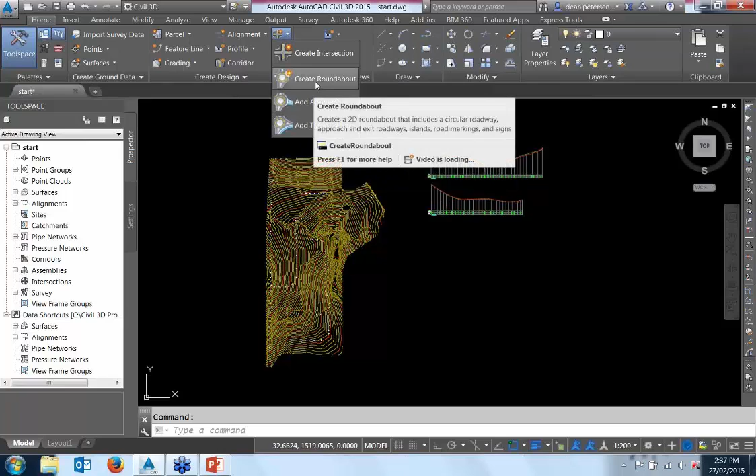Okay, so starting at the beginning, I guess, and then taking it a bit further. So about the 2010 version, they introduced these intersections in the intersection tool, which is up here in the Home tab of the ribbon under this drop down here, for create intersection. Now there is below that some things about roundabouts, but if you hover over them, there's a little video that shows you what they're about.

Making a 2D design of a roundabout, they're not making a 3D object. So to make an actual 3D corridor that you can use to make surfaces, etc. off, you need to use the first one, the create intersection tool. So that's the one we're going to have a look at today. Let's click on that.

It then says select the intersection point. Now in this data set I've got a whole bunch of alignments, and I'll try not to move the screen too fast so it doesn't lag too much on your machines running over the web. But each alignment has its own design profile already. Now it does require a design profile on each alignment running in so that it can work out the levels it has to make this corridor at. If you don't have a design profile for each incoming road, you'll get halfway through the wizard we're about to go through and you'll find that part of it's grayed out. If that happens, it means you haven't got design profiles for all of the incoming roads.

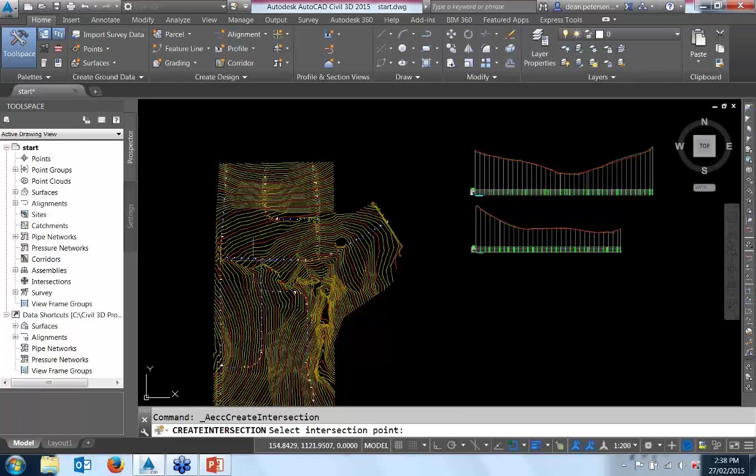In this case, we've got T intersections, but it works just fine with X or cross intersections as well. These are not actually at 90 degrees, it handles angles and things quite easily, and intersections on corners, no problem as well. We're going to do one here to begin with anyway.

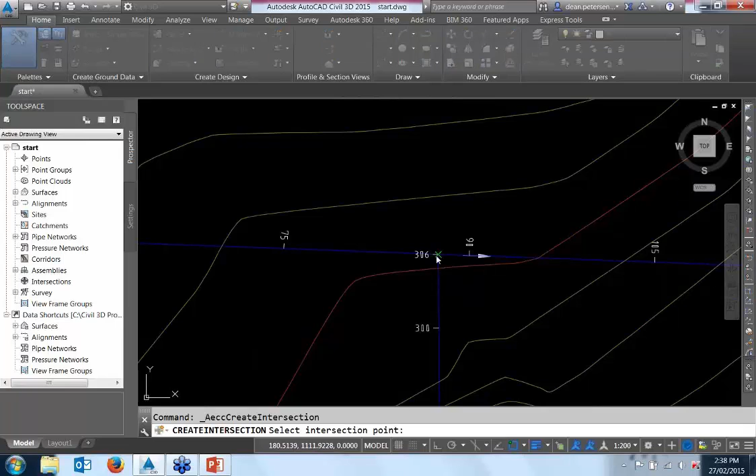So I'm just going to, when you start the command, on the command line, it says select the intersection point, find where two alignments intersect, and click there.

Okay, so this is the wizard that comes up. It's a 3-step wizard, and you just basically look at each of the components in each step. So you can give the intersection a new name if you want to. I think this is utility 3 and utility 2 if I remember correctly, but let's just run with the defaults for the moment. And it's going to put a label there that goes on no plot layer, so that's fine.

Main option in here is what do you want to do with the crossfalls of the main road. You can either run the main road all the way through, maintaining its crossfalls, so the side roads match into it, or you can go all crowns maintained, so all the roads meet at a point in the center, but whichever road you drive through, there will be a bump in the crossfalls as you drive directly through that intersection.

The more normal case is the primary road crown maintained, and if you've got T intersections such as we have here, the top of the T that runs all the way through will be the main road by default. We'll go next.

Okay, so here's our main road at the top, priority 1, and the secondary road, priority 2, down below. You can change that order with the arrows at the side if you've got a cross intersection. So basically the second stage of the wizard, you just click on each of these 4 buttons and fill them out as needed. So we've got offset parameters first, which brings up this little panel.

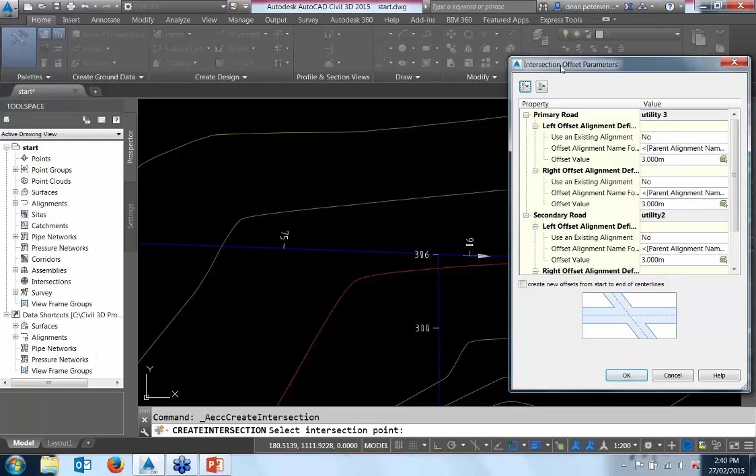Now, if you have a look in each of these panels down the bottom, there's a little picture. And when you click on one of these lines up in the table above, it both highlights in the background the alignment that it's referring to as the primary road, which is utility 3, so I click on that, it highlights, and the secondary road is the one heading down to the south there, utility 2. If you click on the space for the 3 meter entry here, the offset value, you can see that it is the width of one of the roads, in this case the main road, that you're going to be typing in that pane, and that is the width of the other side of the road when you click on that. So watch the picture down the bottom, that'll tell you what it's wanting.

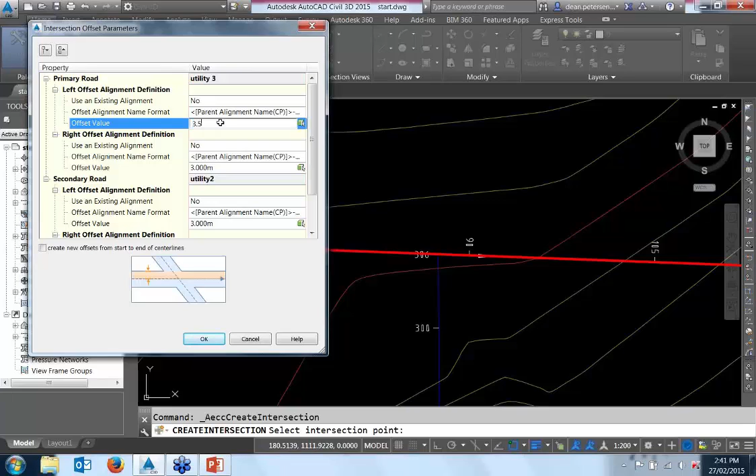I'm going to leave that 3 meters, I guess. Oh, let's make that, let's up that one, make it 3.5, and that one 3.5.

And for the secondary road, we'll leave those as 3 metres and 3 metre lane widths, and those are the lane widths up to the edge of seal.

You do have the ability here to use an existing alignment, so you would set that to yes and select your alignment. If you had an existing curb you wanted to keep as a side of the intersection that you've surveyed, you could run an alignment through that, tell it to widen the intersection out to that alignment, and then match the levels when we set the crossfalls of the slopes. You can match into the levels of an existing curb, which would be a surface profile out on that alignment.

So that's always useful. However, in this case we don't need to do that - we've got a bit of a greenfields here. We will use that shortly when we combine these things together though.

What I always do is tick on this create new offsets from start to end of centre lines. This is going to make offset alignments which are slaved to the centerline alignments of each road, but they define the widths of the intersection, plus I'm going to run them all the way along the alignments because we want to use those later on. I usually always tick that one on. So do that and go OK.

The next step is what do we want for curb returns. So if we click on the curb return parameters, here are our curb return parameters. Again, in the background, it highlights the particular curb return we're talking about. So if I change another quadrant, it shows me which quadrant we're talking about.

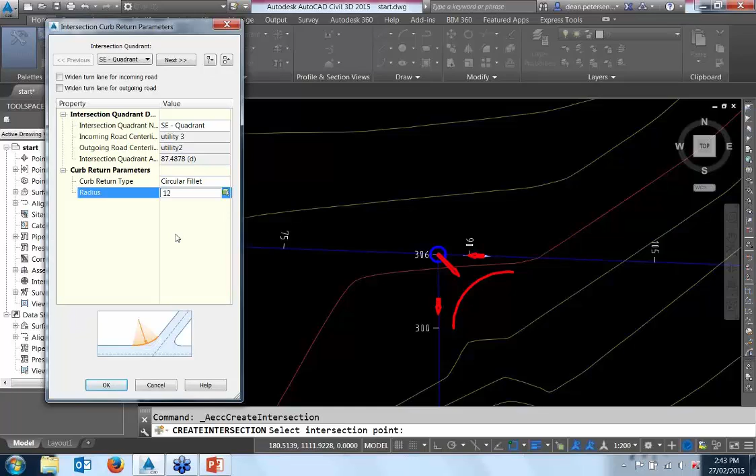You've also got options here if you want to widen the turn lane for the incoming road, which makes a turning lane for going into or around this particular curb return. And you've also got widen turn lane for outgoing road, which makes a merging lane once you've gone around the corner.

Let's actually do one of those. So let's just do a turning lane in there to get the traffic out of the way, the main flow in the main road there before it goes around the corner.

And again, you've got sections and details down the bottom here of a linear transition, the lengths, and what size you want, what offset values, etc. You can all change in there for this turn lane. So let's just run with that for the moment and go OK.

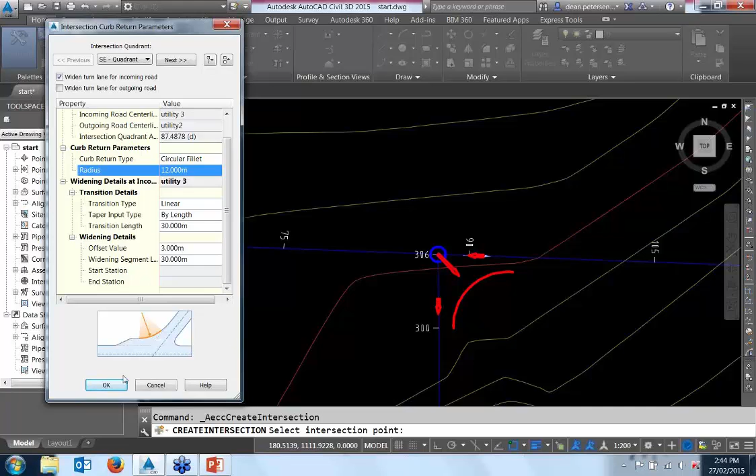Next button is the lane slope parameters. Click on lane slope parameters, and it's just the crossfalls of each road. So let's just run with all 3% minus all 3% sloping away from the centre line.

Obviously, if you have mono slope, you can make one negative, one positive, and this is where if you had an existing curb, you could tell it to use the surface profile for the existing curb out on the alignment you've drawn, and it would match or change the crossfalls to match whatever's existing out there, which is also very useful. We're going to use that as well when we put two of these intersections together. So I'm just going to leave that all as 3% at the moment and go OK.

And lastly, curb return profile parameters. This is basically going to put a little 10-metre stub on the ends of the intersection, and I find that very useful. You can make them smaller, even half a metre if you want, but I do find those useful to have, and you'll see why in a moment.

Thing to note, in profile, the curb return is always drawn as a straight line profile, so if you're in fairly steep or rugged terrain - well, a lot of New Zealand's pretty steep anyway - you do need to go and have a look at the curb return profiles and perhaps draft your own one there. I will have a look at that as we go, but that's a reminder of what the software actually does.

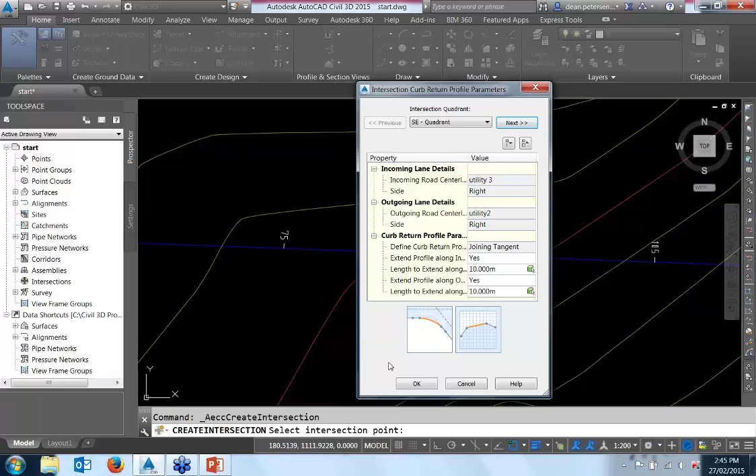So we'll leave that as all good and go next. The last step in the wizard is to decide what you want to do. We're going to create a new corridor, since we don't have a corridor at the moment in this drawing.

The EG surface for the daylight or batter slopes to finish on, that's great. Now, the one thing you need to do the first time you come into here is click the Browse button. When you do that, if you haven't used the intersection tool before, you will be in this folder, which has the American assembly sets for making the corridor from.

These do have a left-hand side drive of the road, but more often than not, when people use these, they grab the right-hand side drive of the road, and the corridor ends up turned inside out. The intersection corridor is inside out, with the batter slopes in the middle and the lanes on the outside.

I recommend that you go up one level in the folder structure here and grab the ANZ folder, and within there we've got three options, all left-hand drive, so we can use those. Let's grab the curb and footpath. You can go curb, no footpath, or just a paved area and put on your own curb and footpath or shoulders afterwards.

But let's grab the whole lot. At the moment, go curb and footpath ANZ and click open. Next time you come into here, it will have remembered that choice, and in this dropdown you'll be able to select it.

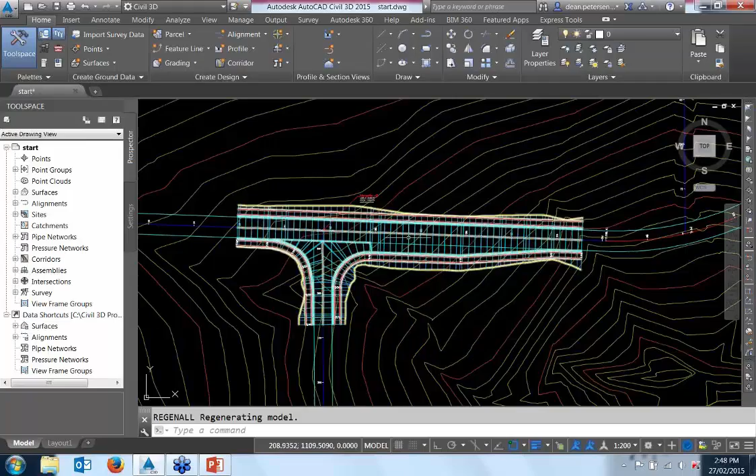First thing I always want to do is pick the corridor, right-click Object Viewer, give it a rotate, let go of the left button, and see that it has formed up correctly, and that's looking pretty good. So I'm pretty happy with that. It's all at the correct levels, and it's running well.

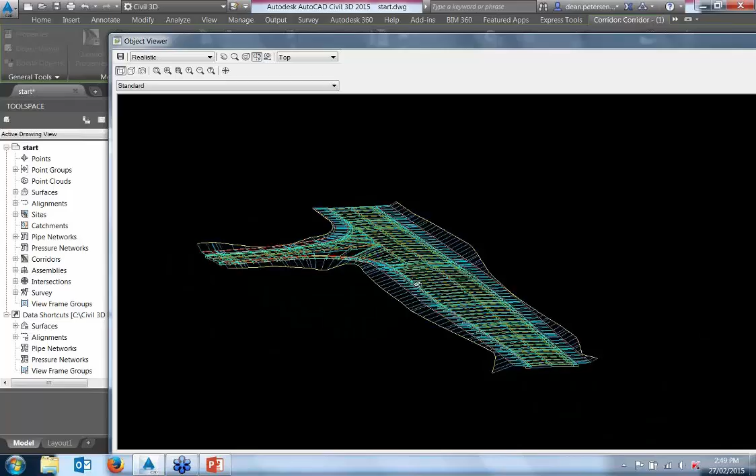Okay, that's one intersection. Now there's two schools of thought, really. Let me just do a save at that point, just in case—I'll do a save as, throw it on the desktop.

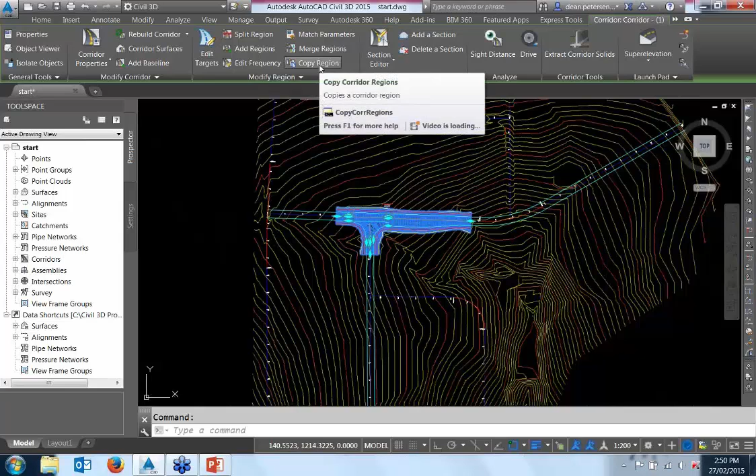There were two schools of thought when these intersections first came out. One was to make your corridors first, leave a space in the middle, and then make your intersections afterwards, filling in those spaces between the corridors you'd already made. The second school of thought, and the one that makes more sense to me, is to make your intersections first, as I've just done here. Then, once you've got them created, you can fill in the gaps in between, or the bits of road you want to extend them along, by picking the corridor, going copy region up in the ribbon, and picking the end region.

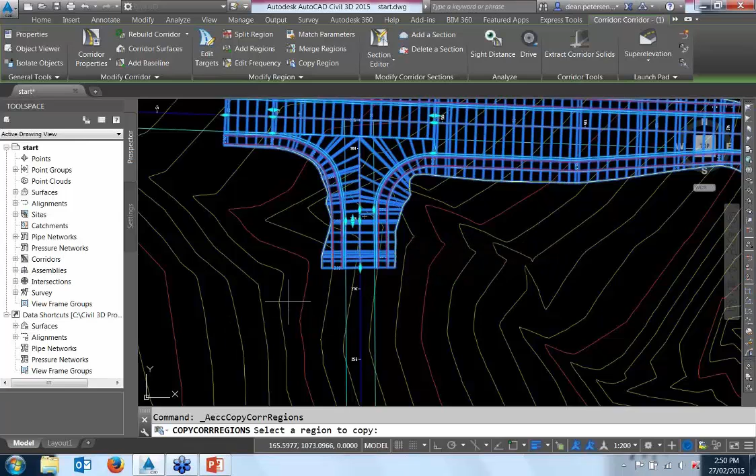Now here's something—have you noticed 2015 AutoCAD, when you pick objects, often wants to highlight them in blue like that? On the command line it's saying select a region to copy, and here's my first tip and trick. Used to be, when you move your cursor over a region, it's actually highlighting in blue, but it's already highlighted in blue, so you can't see the additional highlighting. I'll just hit escape here, get out of that. There, you can turn that off—there is a command called selection effect.

If you type SELECTIONEFFECT on the command line, you should get the selection effect. It will be on 1 if you haven't changed it already. Put it on 0 and it goes back to the old selection style.

So when I pick that corridor, it now goes, those dashed lines don't turn blue, which means that when I go to copy region, it highlights the regions again for me to pick from in blue, which is nice. So I now want to pick this one.

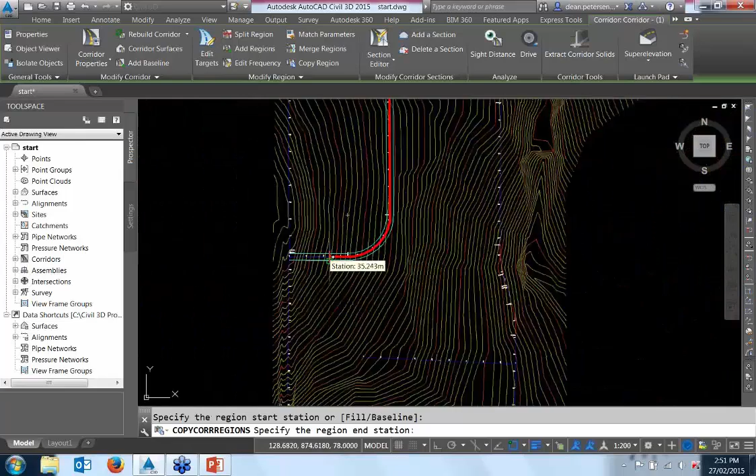One of the reasons why I left the 10-meter stub on was that I can pick it and copy it, and it gives me a little runner. Because I told it to make these cyan lines on either side of the main centerline as the offset alignments, running from the start to the end of each alignment, they go all the way down the road. So I can say I want my new region to start here, run all the way back down the road and around the corner and to about there.

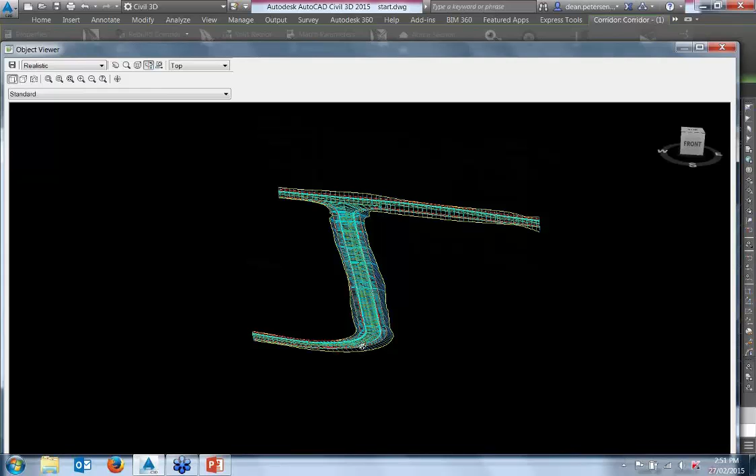And now you can see I'm actually using the corridor that has been made for the intersections, but just duplicating it down the road where I need to, so I don't actually have to manufacture the road down the hill. It's being made for me with the assemblies of the intersections.

So we should have a look at those assemblies and intersections. What it actually did when we built that intersection was bring in, and it'll be somewhere up near the top right-hand corner of your model space, these assemblies. Now what I normally do is move the text a little bit just to line up so I can read it a bit more easily.

These are all the components used to make up that corridor for the intersection and now for that section along the road. You can change these, so put your own batter slopes on them, put your own footpaths or curves, whatever you like. There's a nice little tool actually these days.

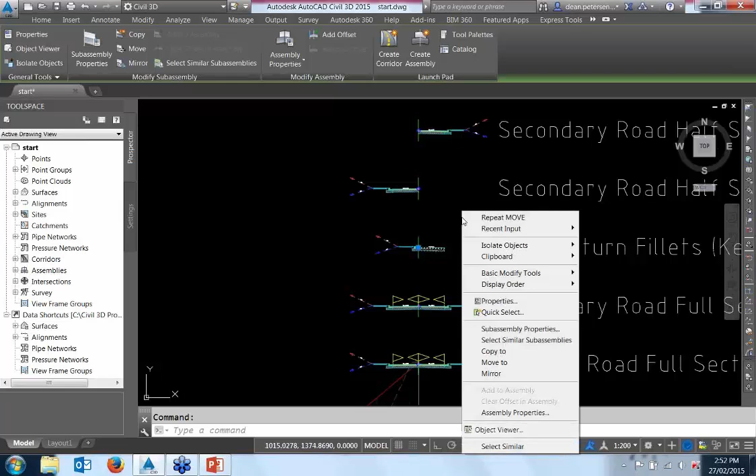If you pick any subassembly, you can right-click and go select similar subassemblies, and it grabs all the ones in your drawing of the same type, and then you can go Control 1 or right-click Properties and change all their properties all at once, which is very useful.

Similarly, you do want to make sure it grabs them all as well. Sometimes these daylight lines can be slightly different all through here. But obviously if you're changing one, you probably want to, well, almost always will need to change all of them at the same time to make sure your intersection is correct all the way around.

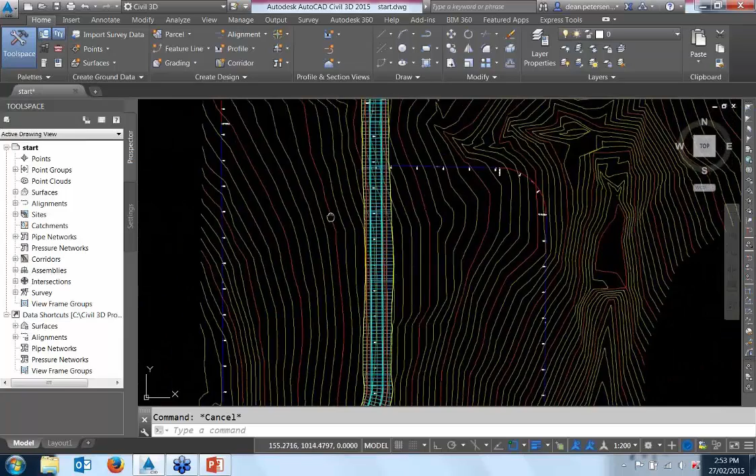So that's where those assemblies come into it, and those are those A and Z ones we picked on the way through the wizard. All right, so let's look at now making another intersection over here, another part of our subdivision. So we start the wizard again.

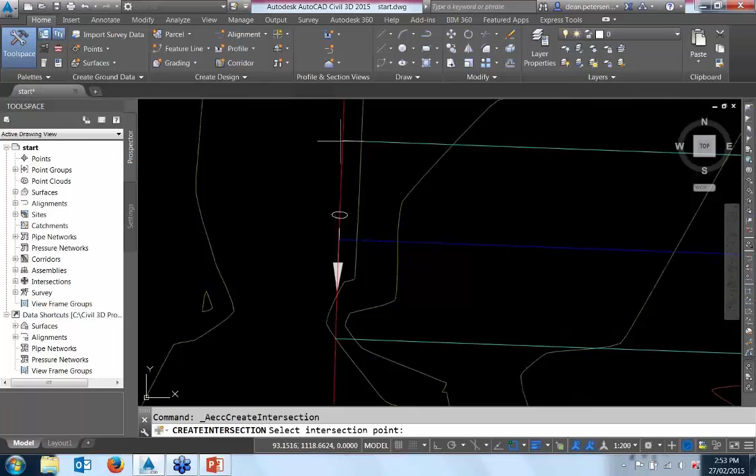Intersections, create intersection, and make sure you do get the center line. Don't pick the offset alignments over here. Grab the two center lines that intersect. And we're looking at making a new one.

So in this case, let's use the other option just for the heck of it. All crowns maintained. Go next. That's all fine. The offset parameters for this one.

Now, here's the slightly new bit. We've got a primary road, this one running all the way through here. We don't have any offset alignments on either side of that, so we want to create some more. So I'm going to tick on create new offsets from start to end of center lines again. So for that, let's make that also 3.5 and 3.5 wide.

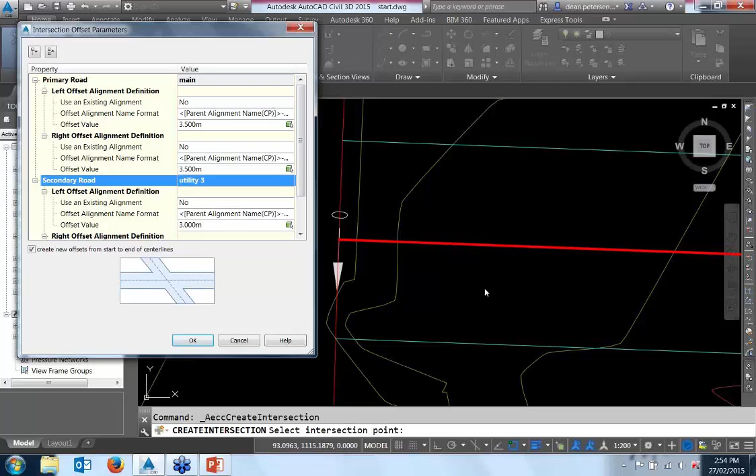But for the secondary road, which is now this road here, we do have our offset alignments and our offset crossfall levels based on those alignments to use. If we just left this as it is, it would create new offset alignments running all the way along that alignment, and you'd end up with two objects over the top of each other, and it could get quite messy if you've got lots of intersections in the drawing.

So what we want to do is tell this to use the existing ones for the secondary road, which is the one highlighted in the background there, which is our utility 3. So where we see it says use an existing alignment, we're going to go yes. So we don't have an existing curb line surveyed out there, but we do have these running off the other intersections, so the alignment name we want is...

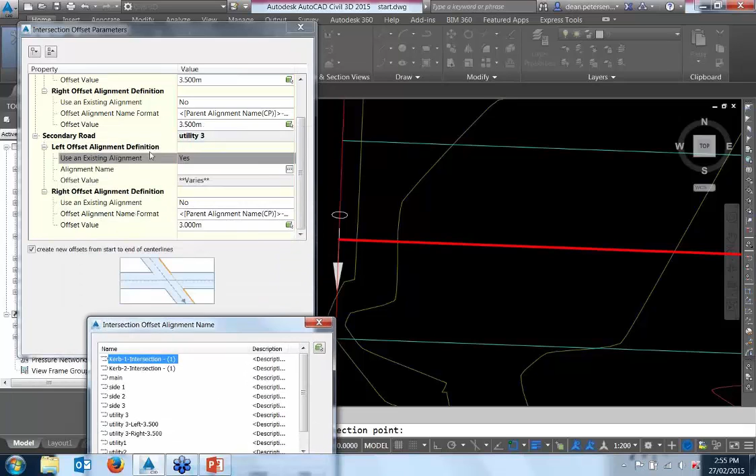Now you do need to be careful which is the left and the right. This is the left offset alignment. This alignment runs, the chainage runs from left to right, so the left hand side is going to be to the north.

You can pick this green button up the top here to pick on screen, and pick that offset alignment to the north. You can see they have been well labelled: it's utility 3, which is the centerline name, it's the left, and 3.5 metres out. So that's the one we want.

We go OK, and for the right we're going to use an existing alignment, yes. The alignment name, again because it's well labelled I know what it is, it's utility 3 on the right, and go OK. Do make sure you get your lefts and rights around the right way, and that they are the correct ones for that centerline, or the intersection just won't work.

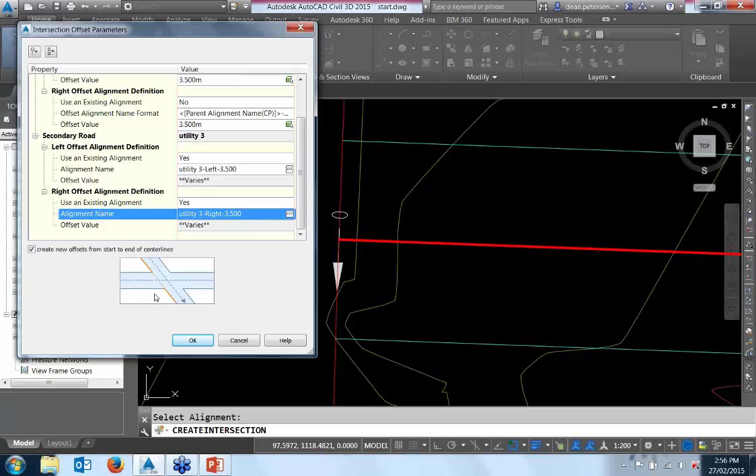Alright, and again tick on that button, create new offsets where it needs to, and we go OK. Curve return parameters, I'm actually just going to run with the defaults there for the moment. I don't need to change those.

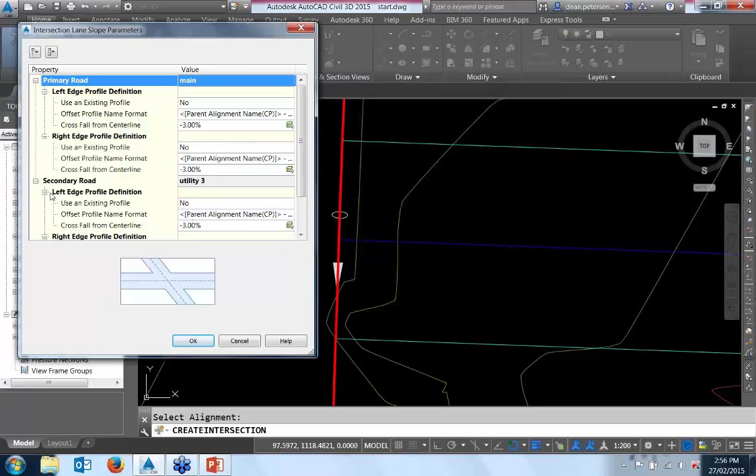Nothing new there. The lane slope parameters though, we need to do the same as what we did with the offsets. For the primary road, we'll make our new ones, 3% crossfalls. For the secondary road, which is our utility 3, we want to use the pre-made profiles that go with those offset alignments, so we go using existing profile, yes. The profile name, again, has been well named, so it's utility 3 on the left, make sure left matches with left, and a minus 3% crossfall.

Using existing profile for the right, yes, and it's going to be utility 3 right, minus 3% crossfall. Alright, so now we are using the same parameters and same objects to target as what the other intersection is. So we're putting it all together. The curb return profile parameters, we will leave those 10 metre stubs all as they are. We go OK.

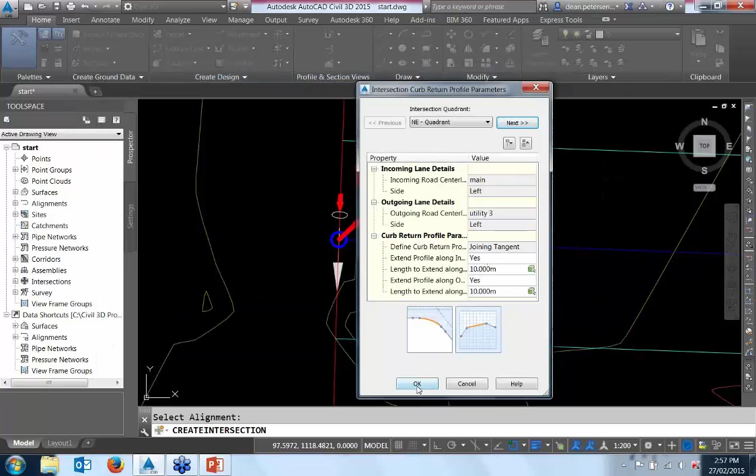Go next. Now, here's the difference: we don't want to create a new corridor for this one. I'd like to add them all to be the same corridor. Add to the existing corridor, which is called corridor 1. We haven't renamed it yet, but it's just the corridor we made with the other intersection. So add to existing, that's an easy one to miss.

Again, there's our daylight surface, and we're going to use the same assembly sets, which is all good. Now we click on Create Intersection.

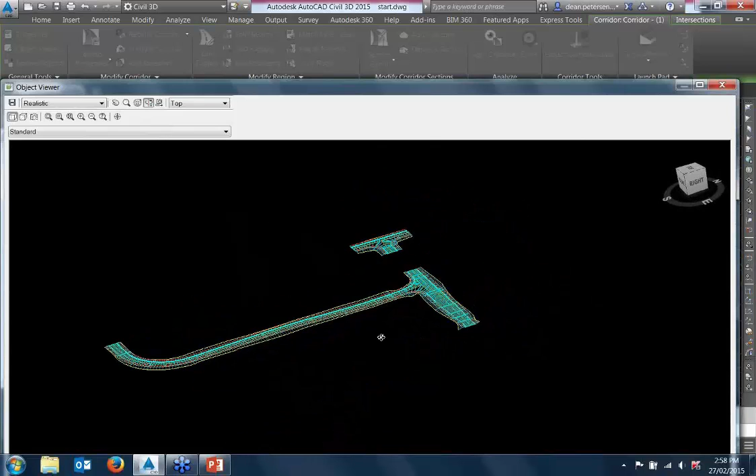Okay, and so now when you pick one of these intersections, you can see the other one highlights as being the same corridor. If we right-click on it, go Object Viewer, it's one object altogether. Alright, that's almost what we want.

One last piece, we want to fill in this gap between the two intersections. So just the same as we did to the south, we can... well actually just before we do that, let's have a look at this offset alignment.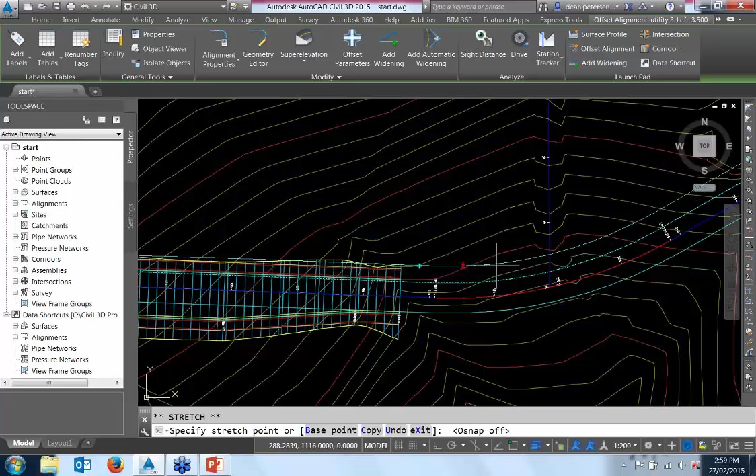When you pick one of these, it gets a little triangular grip for change offset in the middle. If you click on that and change its width, so I think we had 3.5, let's widen it out to 4, shall we say. Where did my... turn that off. Oh, looks like my dynamic input's turned off. Okay, let me just turn that back on again.

There it is. And the dynamic input is that button there. Okay, so when you've got the dynamic input turned on, you can type in the number you want. So it's on the left, so it's minus 4, so it'll widen out to there. And, has it done it? Oh, it did, okay.

Right, so we've gone half a metre further out. You can see that's my edge is sealed there, and it's moved out to that point. We could do something drastic here, so we can move it right out so we can really see it happening.

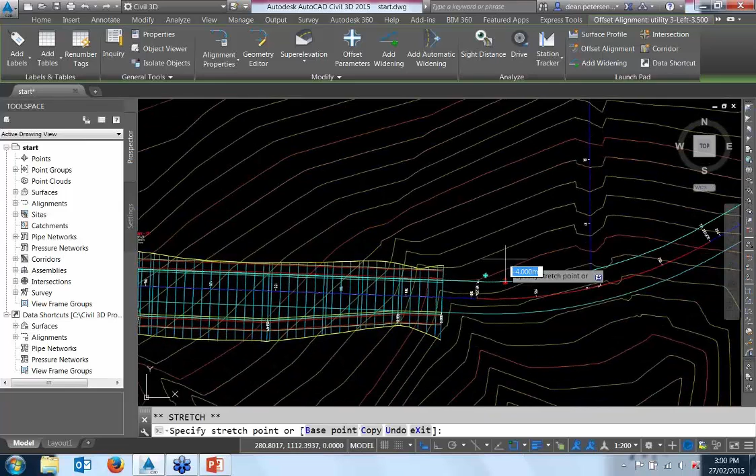Okay, when I'm working with intersections and corridors, and the corridors running off intersections, I don't normally put them on Rebuild Automatic. I just tend to have the intersections group and the corridors group expanded out at the same time so I can see when they go out of date. You can see it takes a few seconds to update.

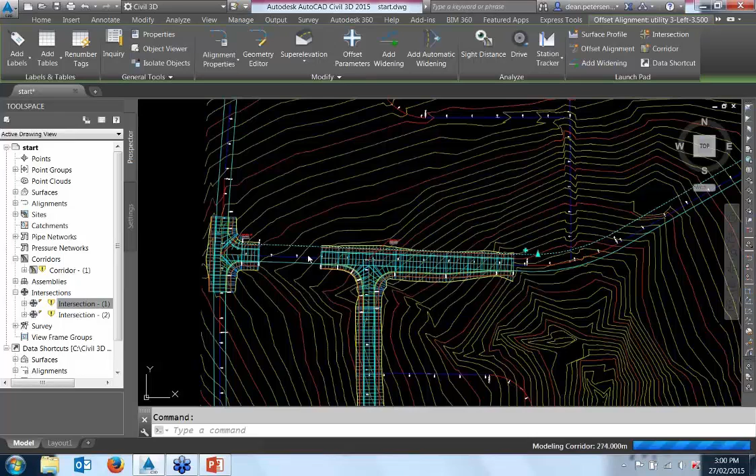So if I right-click on one of those, Update Regions and Rebuild Corridor, continue with Update, you'll see that both intersections will now move out as I moved that offset alignment out. So they're slaved to it. That's why I can stretch it down the road and have the corridor down the road follow those offset alignments.

Okay, there's another thing you can do with these offset alignments, which is hit this little plus, add widening next to it, and it stretches out a big widening. Well, we don't want it quite that big, so I'm going to pull that in a bit.

When you do that, you get a little grey grip there. You can click the grey grip and get two more cyan grips, and say, okay, I'm going to make a widening that looks like that, runs around corners fine, and you can use these diamonds in the middle of the road to shuffle it up and down the road as needed.

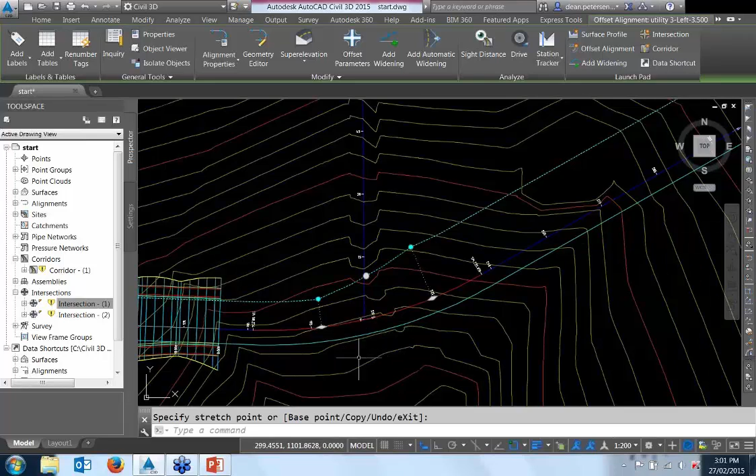You can also have a look at the properties of that. At the moment it's linear, even though it's going around a corner, it's a linear change.

We can have a look by picking that offset alignment, going into the offset parameters up in the ribbon. We've got the ability to say, okay, maybe we don't want it linear, maybe we want curve, line, curve, and it makes that a much more curved transition between the two widths. Then you can control that transition with the transition length, the curve 1 radius and the curve 2 radius, and play with that to get something nice and smooth.

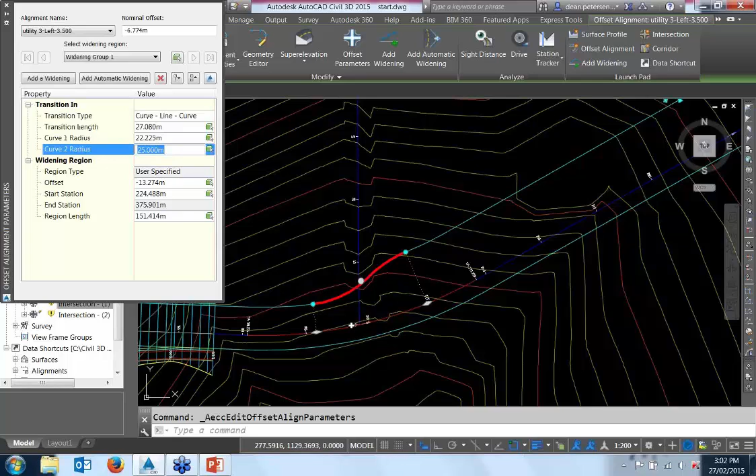But the advantage of doing that is that you can now do the same as what we did before, which is pick the corridor. By itself would be a good thing. Copy region, copy that region from here and down the road, and because it's already slaved to that offset alignment, it's going to widen out and follow whatever we do with it, which is quite useful.

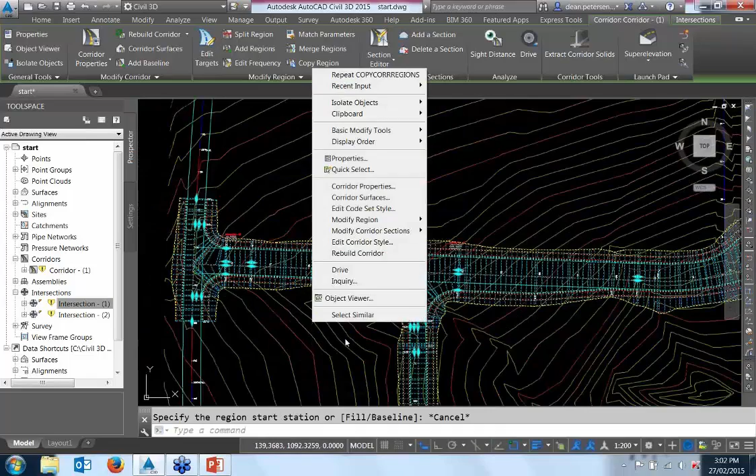More to the point, we can also go copy region and pick one of these and fill in the gap between two intersections. So you can see we're building that up quite quickly and easily.

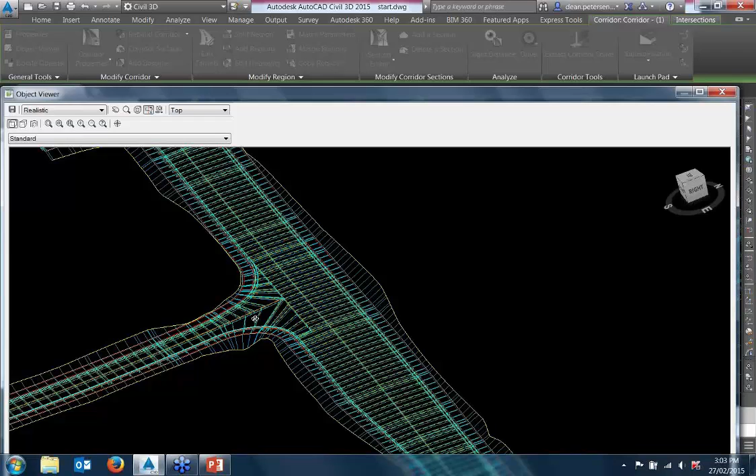Alright, a couple of things we want to do probably. We want to look at what's happening to the centerline of the secondary road as it comes up and matches into the existing road. Now the existing road levels won't have been changed, but the side road has been told to match into the crossfall found on the side of that road, or within a few degrees of that crossfall. That means that if you move the main road up and down, the side road will move up and down with it, but you need to look at what it's doing to the profile.

So we probably need to have a look at the profile of that side road. Let's go and have a look at that. Is this one of them? Utility 2, I believe it is. Let's have a look. Yes, it is. Cool, okay, so this is the profile of that road running to the south.

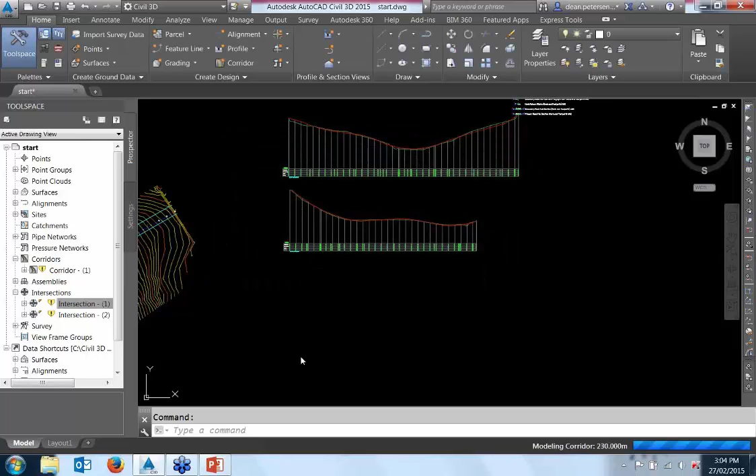You can see, if we scroll into the right-hand end of it, when you see this, I'm just going to update these things as well. You can right-click, update regions and rebuild corridor. That's because we've been playing around with alignments associated with those corridors. Continue with update. There we go, okay. It's going to go out of date when we play with this as well, but never mind.

So here, these two little padlocks on the right are the centerline and the edge of the main road that it's matched into.

Beyond that point, we can start playing around with these and matching the lines in. So we do have a bit of a breakover angle there, though it's within the allowable. I think it's allowed about 6 degrees or so between those. But what we can do, if we want, is just start editing this.

Pull it up a bit, smooth it out. Of course, we can do it numerically as well. If we want it to match, we might need to reduce the size of some of those curves first, though.

So we can bring up the geometry editor for that. Have a look at what crossfall we've got there to match into. 3.11, and I've got 4.47 there, so I'll make that 3.11 as well. Minus 3.11.

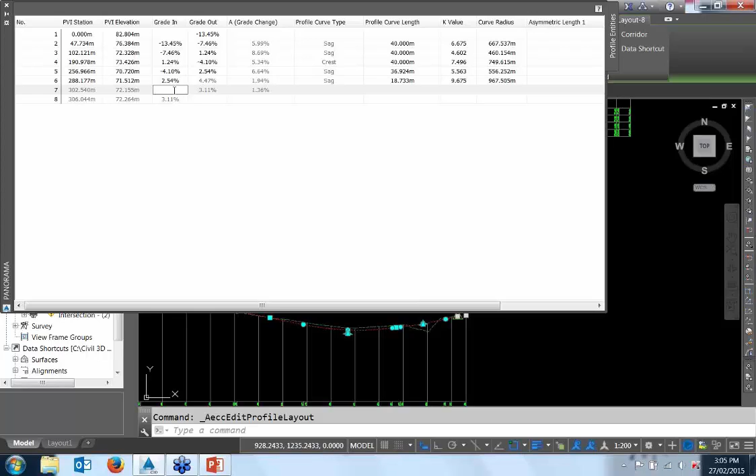Oops, what's that done? Don't think that's quite done what I wanted. No, it wasn't. Let's try that again. Oh, it's not minus at all. It should be positive 3.11. There we go.

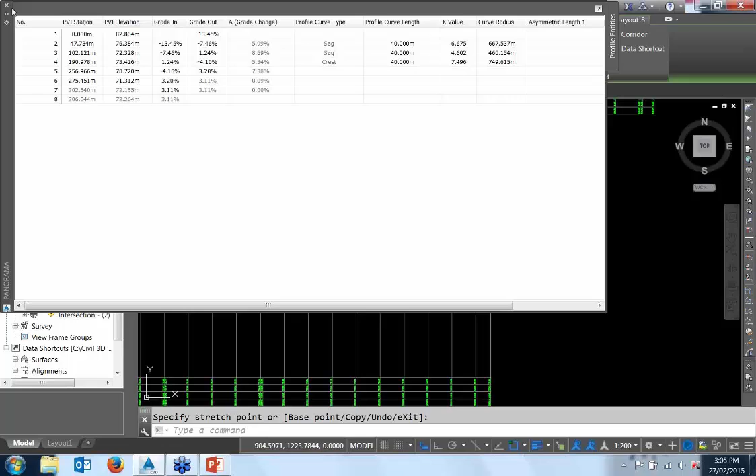So now we've exactly matched that crossfall. We don't actually need that IP at all, so we can get rid of it.

Again with the geometry editor, remove that one and put in a nice curve - more free vertical curves, free vertical parabola PVI based. In there it's going to be that long, looks nice, and we're nice and smooth joining into that again.

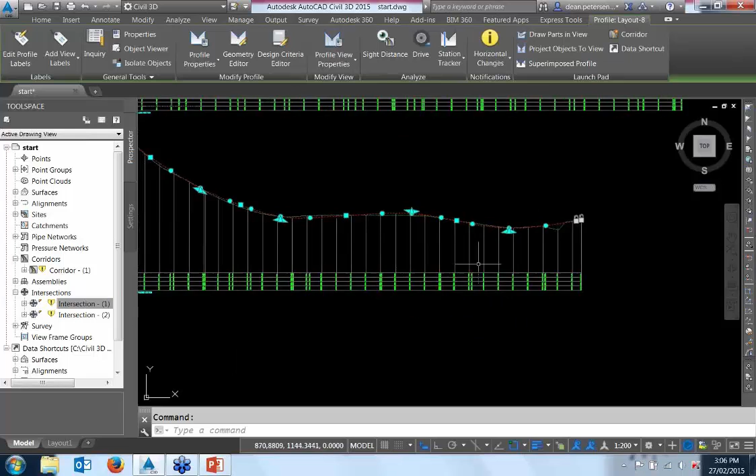So it will move that when it's forced to join the main road with those two padlocks. It will move it up or down to make it function. So whatever you've drafted in, you need to go and have a look if it's affected it greatly.

Then to use that, we update regions and rebuild corridor on the right-click menu on the intersections again. Continue with update, and you should see a subtle change there - oh yep, there it goes. Pretty subtle, but it was there in the actual corridor itself.

So the reason for making all of these as one surface, or one corridor, is to make a surface out of it. If we had these all as separate corridors, we'd have to make a surface out of each one, combine them all together into some sort of combined surface, then combine them into the total model, or finished model for our project. Being one corridor, we can just pick it in the normal way.

Go up to corridor surfaces and create a surface for the whole thing. So we make a new surface called corridor top - so it makes sense. Hopefully name your corridors a bit better than that.

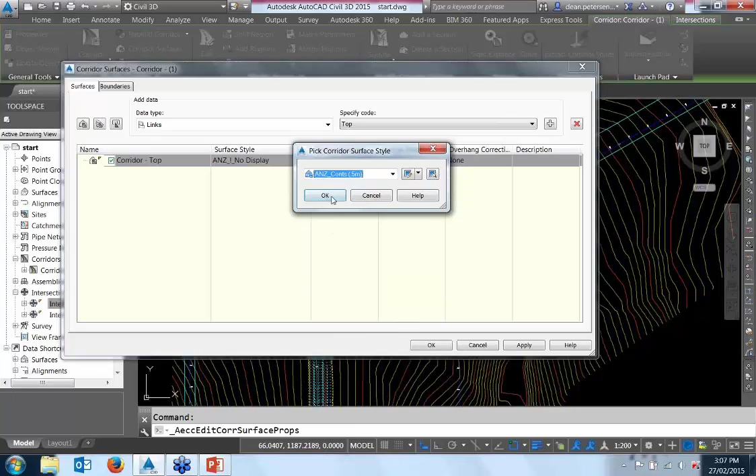A surface style of ANZ contours, 0.5 of a meter, I guess, will be okay. And add in all the top links, as you normally would for a top surface of a corridor. On the Boundaries tab, we're going to right-click and go Corridor Extents as Outer Boundary. Go OK, rebuild the corridor if it needs it, and have a look at the surface that's been created.

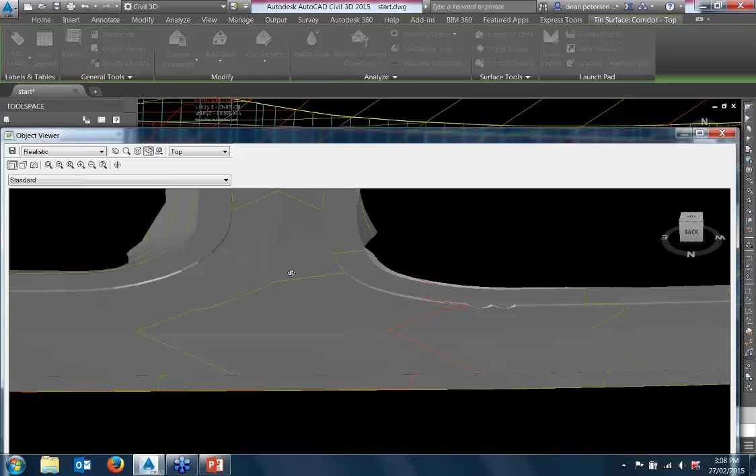Okay, so as you can see, the whole thing comes as one surface. It's looking pretty good - this one up here is not bad. That intersection, curve returns forming up nicely, but this is something you might find on some intersections. There we go - these ones here, just at the edge of a curve return, you can sometimes get the curb doing some interesting triangulation. It's not happening on the other end this time, but often it will be on both edges of the curve return.

There is a little tip I can give you here for cleaning those up quite easily.

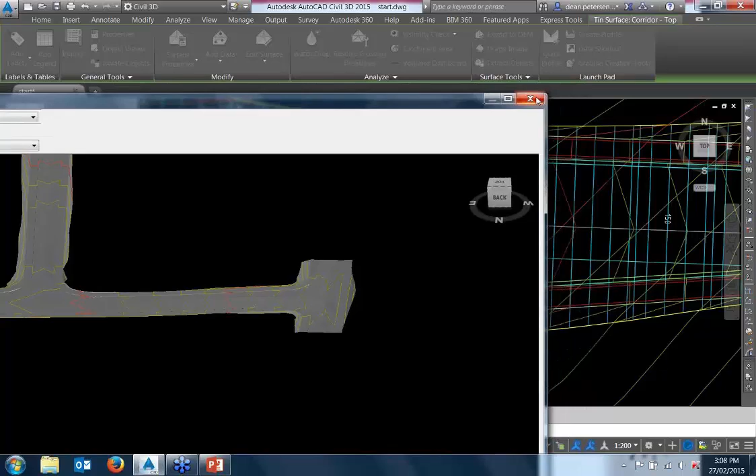So if we go back to our corridor and up in the ribbon corridor surfaces, here's our corridor top surface made with the top links. You want to make the links first, make the surface out of the links first - that's great. But then what you want to do is highlight that particular surface again, change the data type to feature lines, and add in 3 feature lines from the curb.

The ones to use are flange, flowline gutter, and top curb.

Now that flange, flowline gutter, and top curb will act essentially - because we've built the surface out of top links first, anything we put in afterwards becomes effectively break lines if they're feature lines. So these are going to be dynamic feature lines that will move with the corridor, but they will force the fold of the curb.

So we'll go OK, rebuild the corridor if it asks to, and then have another look at that surface just to see that it has actually worked like I expected it to. Have a look in the object viewer.

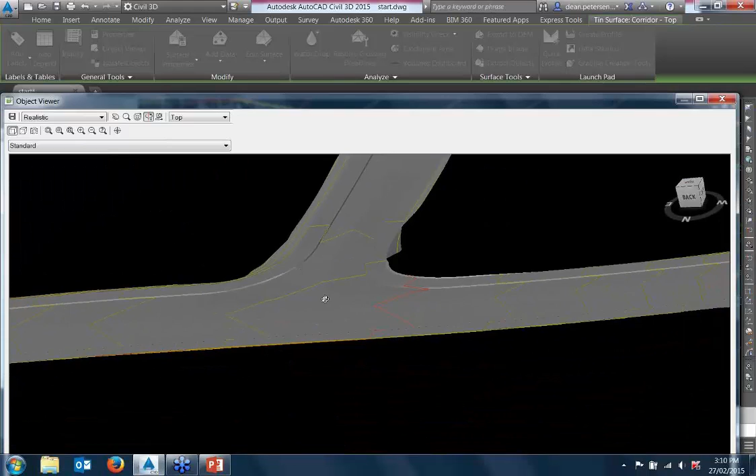And there we go. Okay, so they've become dynamic break lines now for the corridor surface. That will work with any corridor surface - it doesn't have to be an intersection.

So that's a useful thing to be able to use and know about. The other one, of course, is still the same - it's added in the break lines but didn't actually need them, so they just get added and don't have an effect on the triangulation.

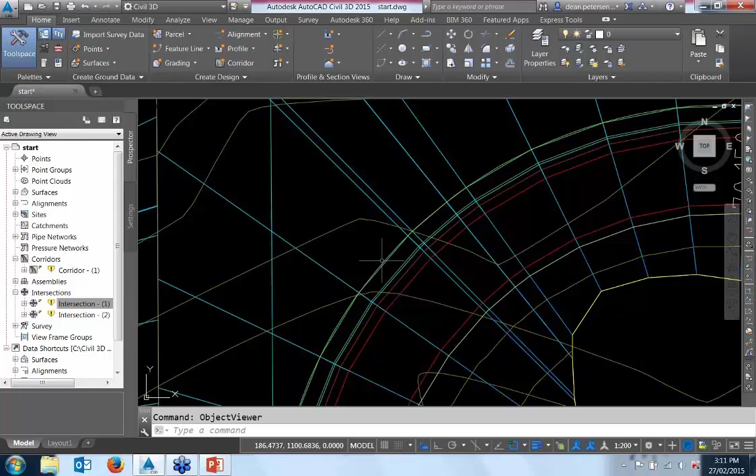Things to look at - we were talking about steep terrain, and you probably want to have a look at the curb return profiles. This is because when you run the intersection builder, it will, by default, put a straight line in the profile from the beginning of your curb return around to the end of your curb return. And you probably, in steep terrain, want to put some sort of vertical curve through there.

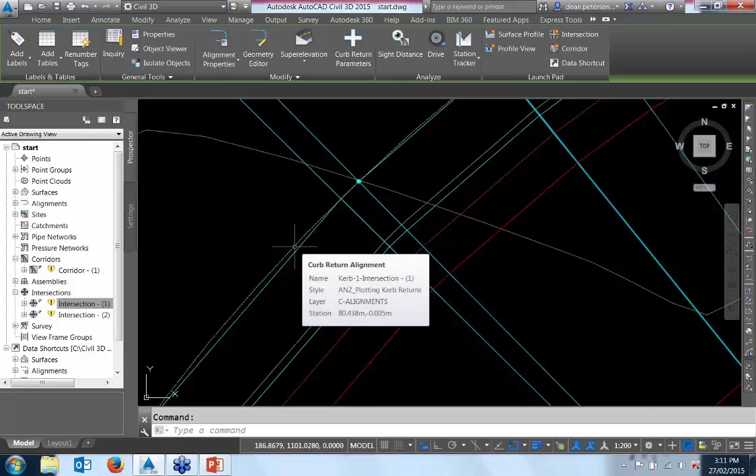So you can pick your alignment that runs around the curb return, which is this little yellowy, greeny line, if you're looking in the ANZ Country Kit template. But when you pick it, you get cyan grips on it, and up in the ribbon it tells you it is an alignment, with properties there.

We'll go to the launch pad off to the side, off to the end here.

My screen's squished up to run through here, but there's the launch pad, and I'll make a surface profile long section out of it. I'll click on surface profile - there is the design profile that the software has added in for us. We want to add in the EG surface as well, just for reference - don't have to, but it's quite good to have. Then go draw in profile view, or draw in long section.

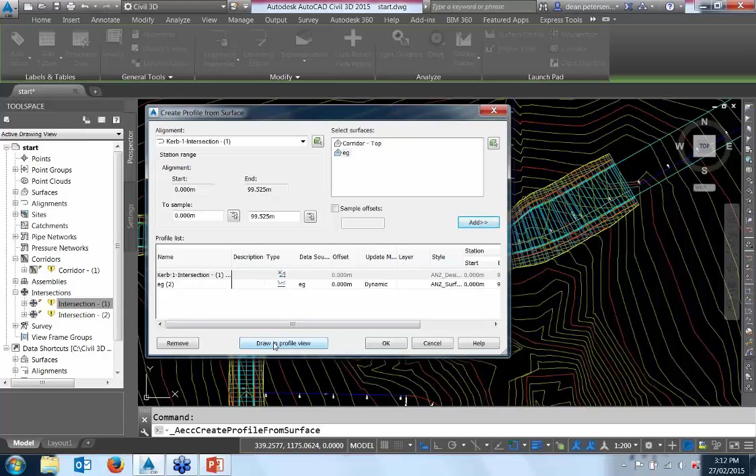I'm just going to use all the defaults in the long sections here. We're not going to be plotting this out, I'm only using it for design, so I'm just going to go create profile view, and I'll put it off to the side here.

Okay, so here is our incoming road, which will be this one running along here with the big turning bay. Going around the corner is the straight line between those two diamonds, and that is the outgoing road to the south, the profile thereof. You can only make changes in the section, the middle section here, which is the actual area of the curb return between those two diamonds.

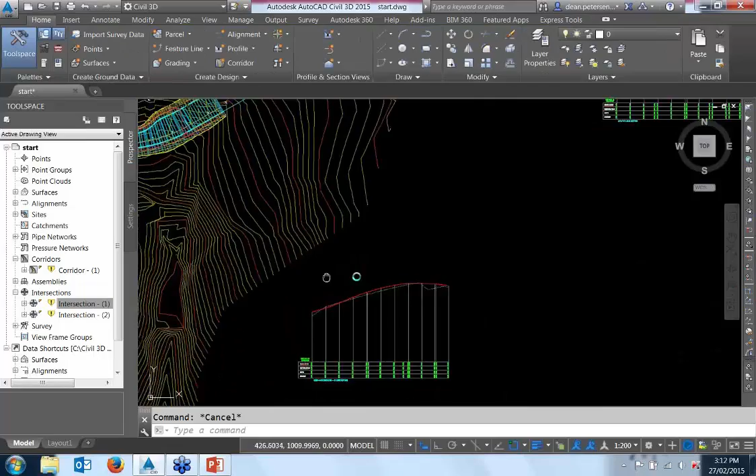Now the intersection itself - you can play around with the intersection by picking the intersection marker right in the middle, and you can go and change any of those things, like edit the curb return radii and things like that, change some offsets, etc. That can all be done from within there.

If you're ever doing a lot of that, sometimes you may find that these diamonds end up somewhere out here, and you get this sort of doubling over of the profile, which clearly is not good, and you end up with a bit of a step in the model where that happens. If you ever see that, it's no problem - you just grab the diamond grip, pull it right to the middle as far as it will go, until it starts rubber banding, and click there, and that'll fix it right up, and then you can keep going.

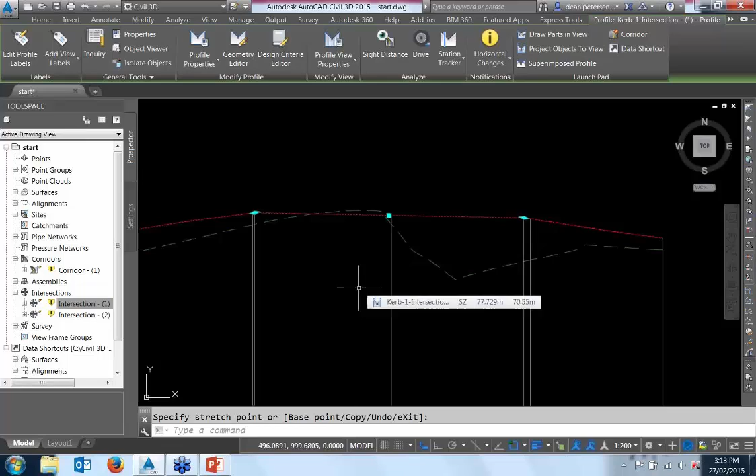Now in this case, we just need a single IP point to make a curve around the top here and smooth that straight line out. In this case, remember, it's 5 times exaggeration, so this is going to be fairly smooth anyway. It's not too bad, but we've got very steep roads that may make a difference.

So what we want to do is pick the profile, as I've just done, to get the grips, click on Geometry Editor, and we're going to put in a new PVI, point of vertical intersection, and I'm just going to eyeball that to be around about through here, through there. It's going to be around about there.

If you had required a reverse curve, for instance this road is coming down at that angle, you'd put one IP point down here, one here, and put 2 curves in, whereas I'm going to put in one in a moment.

Okay, and that being put in, you can hit escape. Now you can use these grips just to match it a little bit more closely. I think that should come that way - that's not bad, and my Mark 1 eyeball is usually pretty good. You can do it numerically if you want, again through that profile grid view up in the toolbar.

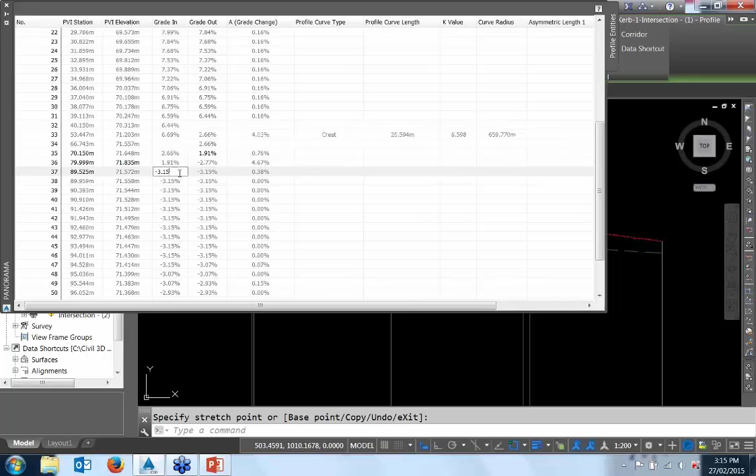That's all our incoming - the only ones you can change are these ones that are not grayed out. So you can see I'm within sort of half a degree just by Mark 1 eyeball, or less - that's 0.4 of a degree. So it's not bad, but you can, of course, come in here and make that exactly minus 3.15, etc. if you want to match it exactly. Not going to get too carried away there.

So we now want a curve in here. From the curves drop down, more free vertical curves, free vertical parabola, PVI based. Click the PVI, digitize on screen just by clicking once, drag it out till it looks about right, and there is our curve that the intersection will now use. So it won't straight line anymore because we drafted our own one in there.

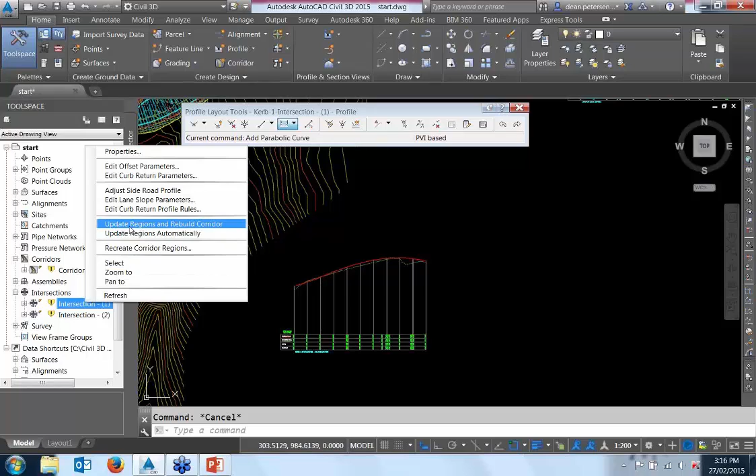So you would do that for the other curb returns, and then go update regions and rebuild corridor. By the way, this 'recreate corridor regions' is for when your corridor or your intersection goes completely wrong and you want to start from scratch again - if you click on that one, it will undo any manual changes you've done, like these curb returns, and you'd need to do them again, so only use that as a last resort. What you do want to do 99.9% of the time is use this one, update regions and rebuild corridor, which will leave your manual changes in place.

As you can see, it hasn't changed it, but the model will now be using that as its curb return profile around that corner. So if you've got sag curves in there, you can specify where you want the low points to be for the sumps, etc. And you can see, that looks so much better already, so much better than the other one.

No, honestly, this is quite flat, so you're probably not going to see those sorts of changes anyway. Okay, so that's good.

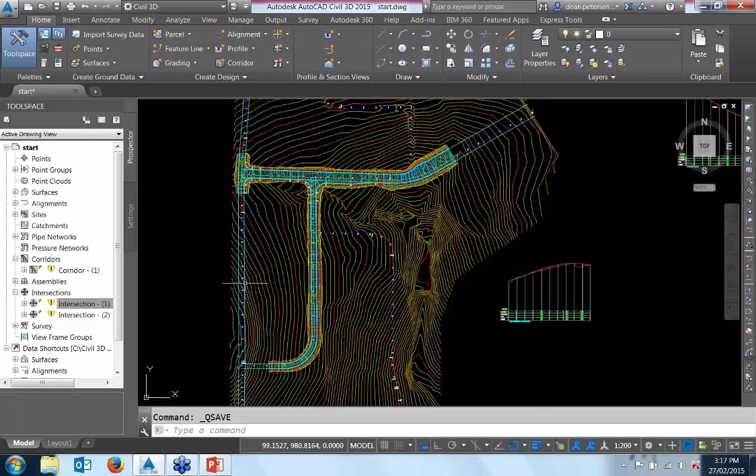Now, there is one more thing I really wanted to have a look at before we finish this webcast. We've got about 15 minutes left. Let's just close that and save, and look at what happens when we have multiple roads enclosing an area in the middle. There is a little gotcha that happens when you do that. It's always been there since day one, or year one, of Civil 3D.

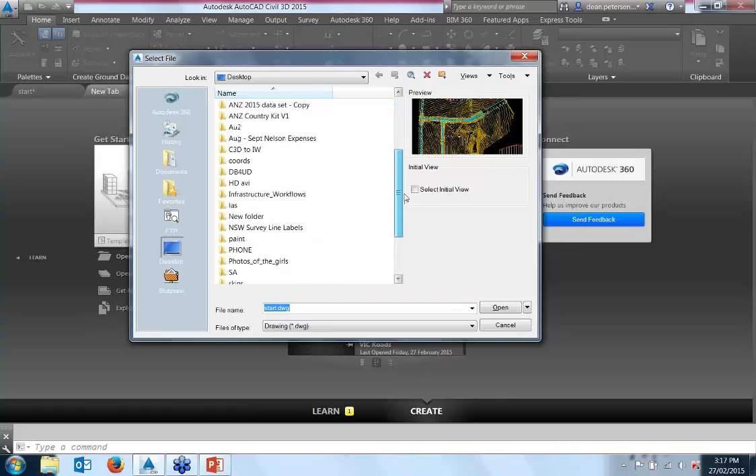So let me show you what happens. I'll just close that drawing, and start a new drawing instead. Open a new drawing - I've got one here that I did before, this one.

Okay, so I've closed that around to make an enclosed area, and you will get this with any enclosed area in a little subdivision you're making. The reason why we need to do something special is that when you put a boundary around that corridor, it doesn't go around the interior of that space. So the actual surface that's built, if I go and pick the surface, the corridor top surface...

Have a look in the object viewer - this is what it's done. It has basically flat-lined from one side of that to the other, and it basically flattened out any EG surface that was in the middle there.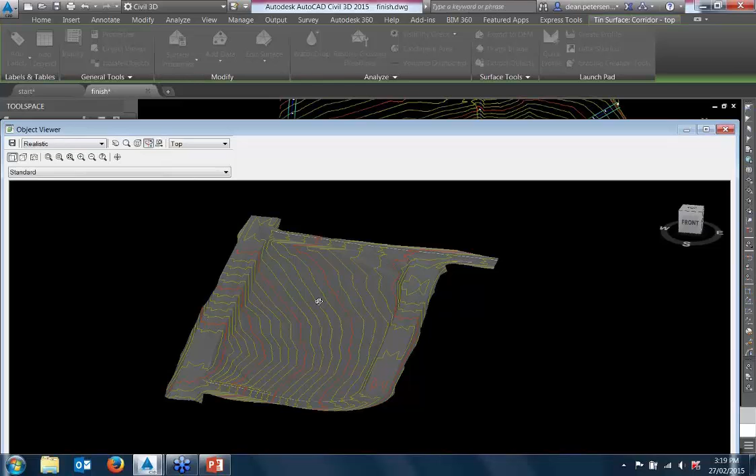Now, it may be an EG surface in the middle there, or it may be a design surface you've already got with your lot levels and things already worked out, or somebody else may have worked out for you, that you don't want to overwrite. So let me show you how you get that to not overwrite, or get around this. As I say, Civil 3D has always done that - it's just something you need to know about.

So the process is this: let me get rid of that final design surface. I'll just delete it. And let's get rid of the infills, because that's what we're going to build.

So what we want to do is produce a polyline that runs around the inside here. I've already done that with this particular one, so I'm just going to turn off that layer for the moment and show you how I got it.

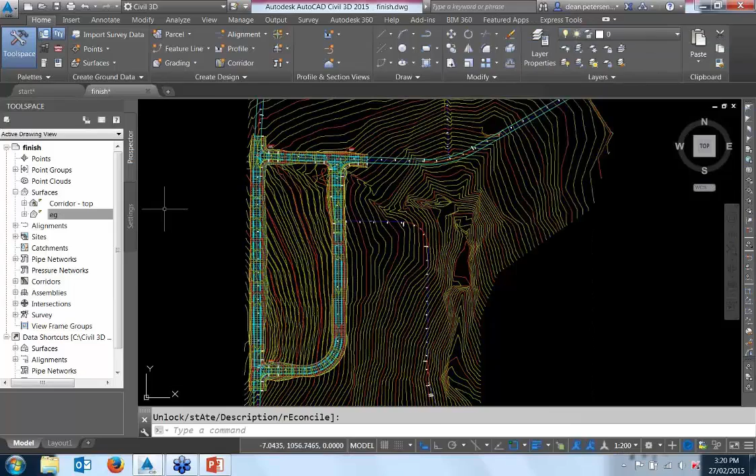Alright, so we want a polyline that runs around the daylight or batter slope edges of the inside of the corridor. So when you pick a corridor up in the launch pad, here's my corridor... there we go, sorry, it was hidden behind my GoToMeeting.

In the launch pad here, from this drop down, we have the option to - just rearrange my screen - there we go, Polyline from Corridor, that's what I'm looking for.

We can create a polyline from any of the feature lines of the corridor, so I'm going to click on that one. It says select the corridor feature line, so I'm going to come to this point here and click on the daylight line. And I don't want it just in the fill areas, I want it as far as it goes. So click on daylight and go OK.

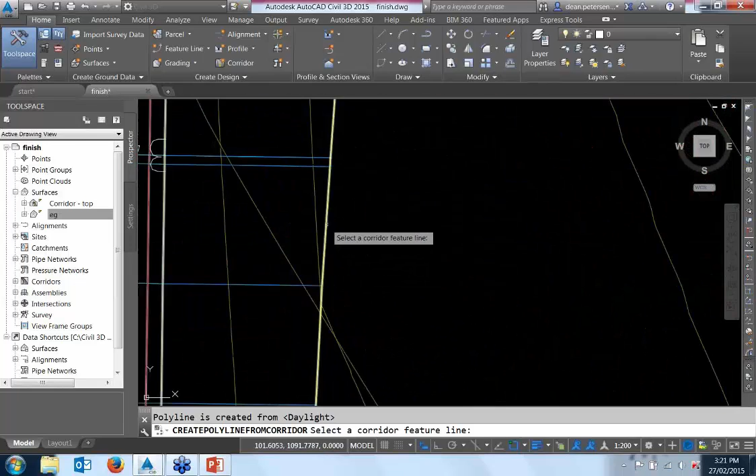That will put a line over the top, on whatever the current layer is, in that color. Then I come to where that stops and click on the next bit, say I want the daylight line there and the daylight for the next region here, and so on. There's another region here, and down around it goes. So those are all individual little 3D polylines that it's produced.

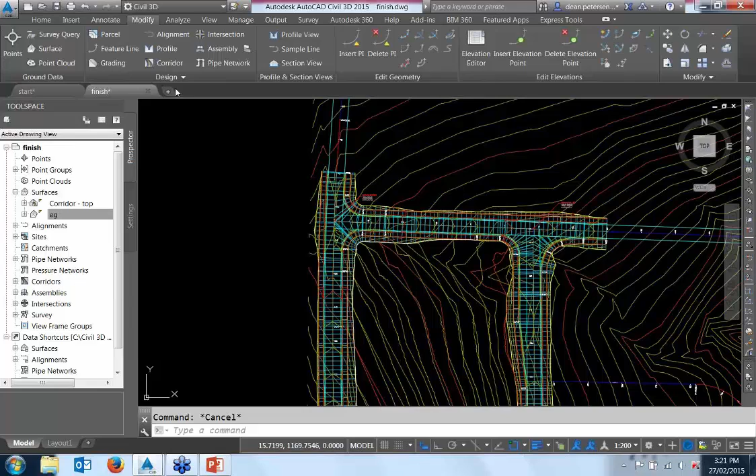And then you want to join those together. There's a nice function for joining 3D polylines - it's under the Modify tab. It's this one here for joining, made originally for feature lines, but it can work with other options as well: survey figures, polylines, parcel lines, or 3D polylines. So it makes joining of 3D polylines far easier and snapping together as it needs to.

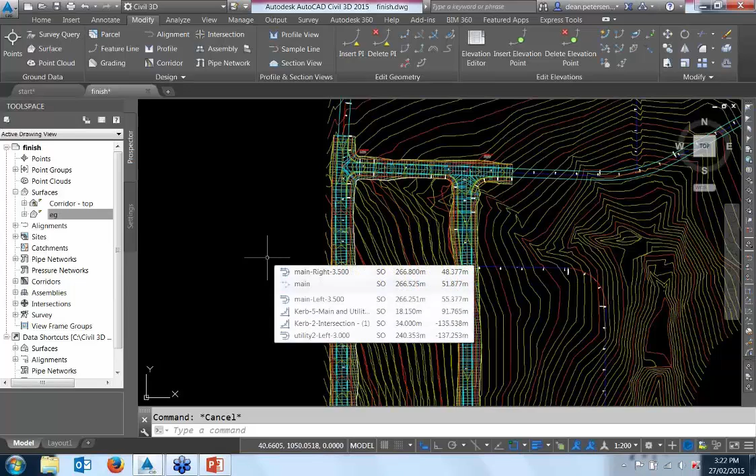So make yourself those polylines all the way around and join them together into one polyline, which is what I've actually put on that other layer. What you might find is that you might get it complaining when you try and add it as a boundary to a surface, which we're going to do in just a moment, that it's looped or has a loop upon itself.

If it has two vertices over the top of each other, that's basically what it's meaning. I did find in this one there was two vertices over the top of each other - vertex 1 and the last vertex were snapped over the top of each other. So I converted it to a 2D polyline, just removed that one vertex and then it worked. There's also, in this Modify tab, you can convert 2D to 3D polylines, or in this case 3D to 2D polylines, which is useful as well.

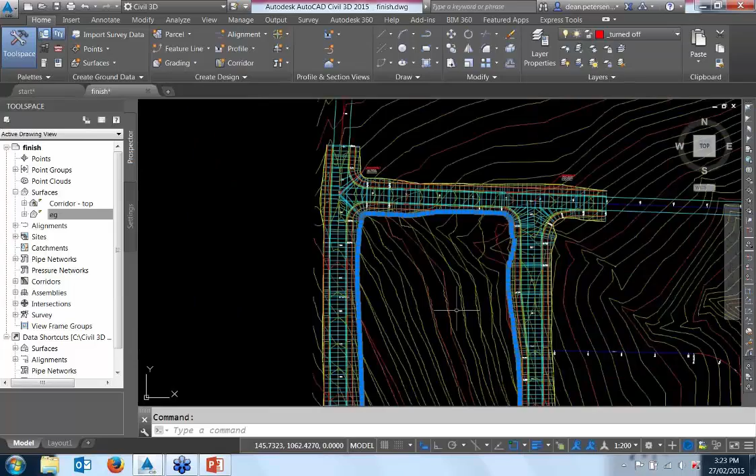That's just what I had to do in this case. But in the end, you produce a final polyline that will look something like this blue one that we've got there. It goes all the way around and doesn't have any vertexes over the top of each other.

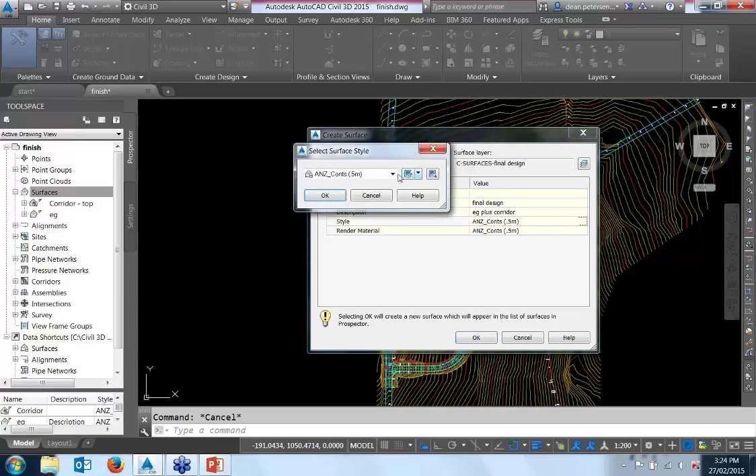So what we want to do, and the way we're going to make this work, is let's do a final design surface first and show you what it looks like before we make one of these and complete it. So if we go create new surface, we'll call it final design. And for description, you put whichever surfaces have to be combined, so it's EG plus corridor. For the style for this one, let's go triangulation cyan, so we can see it happen.

Okay, so into final design, we're going to find the edits. We're going to paste in the EG surface - there it is - and then we're going to paste in the corridor top surface. You can see by the triangulation there, we've not got the EG surface in the middle of that space, which is what you'd expect from what we got out of the corridor.

Have a look at the object viewer. It's just flattened out that area. We should have this terrain of this little creek underneath here still.

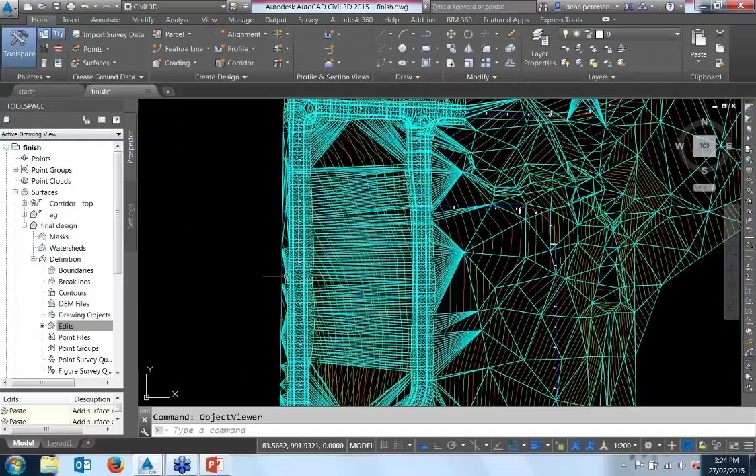So the way to put that back in is to make yourself another surface. So go surfaces, create surface. We'll call it road infill. And let's put on a slightly different style - let's put it onto triangulation magenta.

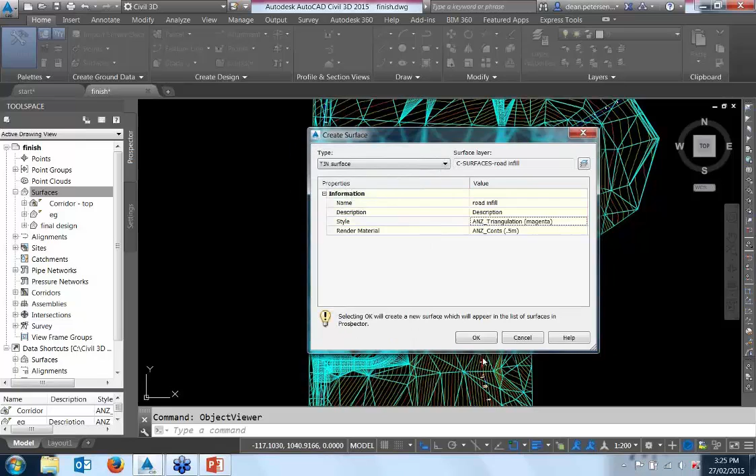And into this road infill surface, we're going to first of all find the edits, right click on edits, go paste surface and paste in EG. So it duplicates EG. Now, you might have guessed this one, we're going to create a boundary.

It's going to be an outer boundary, we'll call it area 1. It's going to be outer, it's going to be non-destructive. We don't have curves, so the mid-ordinate distance isn't going to be used, but we can then find that polyline and pick it, and you can see now we've got that duplicated in there.

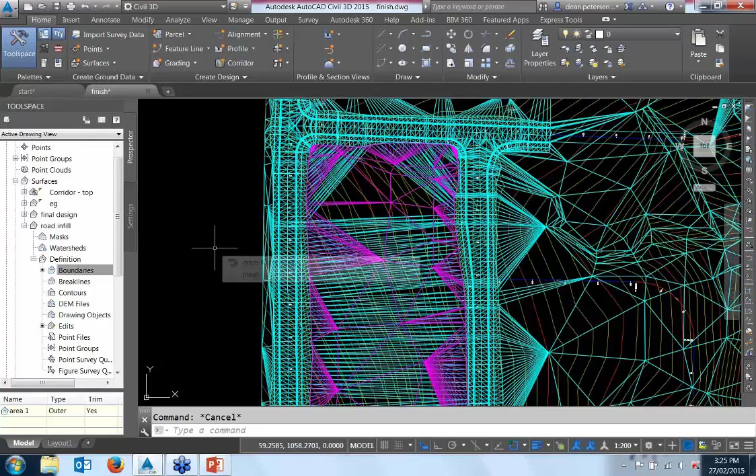So we're pretty much ready to go there. We've got that EG surface in the middle replicated. You can see because it's a 3D polyline, in fact, no - it's actually got the picked up the levels of that 3D polyline as well around the edge.

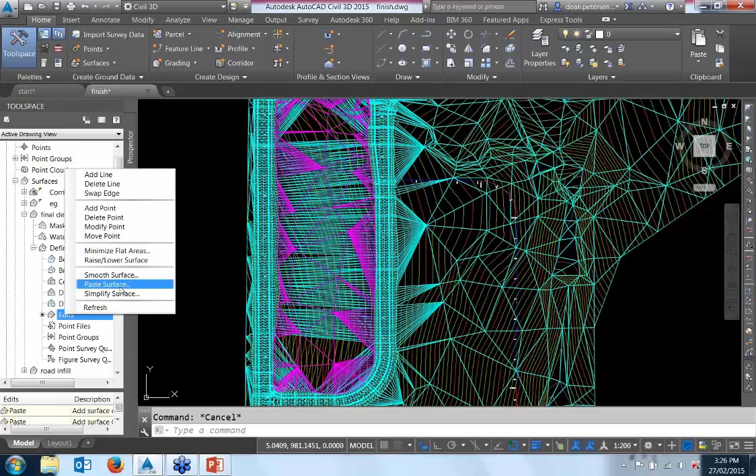So we then put that road infill surface into our final design surface. Remember, just expand out only the surface you want to work with when you're doing it here - it's real easy to put the wrong information to the wrong surface. So we're going to paste in now, and we go down, put in the road infill as well.

So now, if we have a look at our final design surface, we've got our little creek running down through there and our EG levels. Or if it's design levels in there already that you don't want written over, you're going to get those back as well. You can continue adding other enclosed areas to that infill surface - just make them as outer boundaries within the areas that you want, and you'll get the triangulation coming back.

All right, that's essentially the end of where we wanted to get up to for this little session.